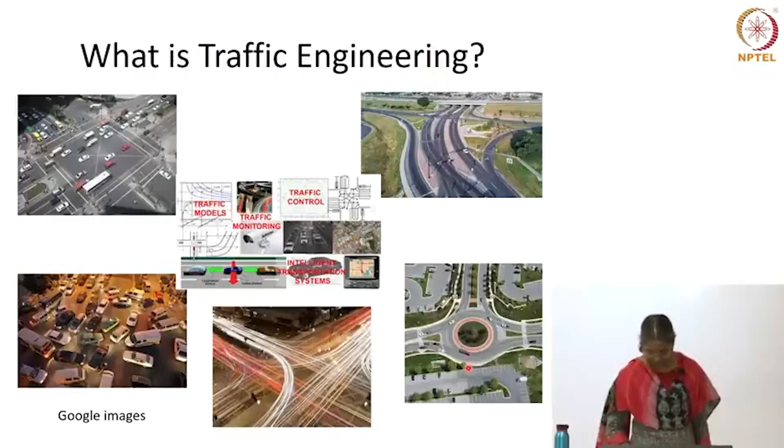So, this is what I got when I searched in Google images for what is traffic engineering. I see intersections, interchanges, vehicles moving, what else do you see? Then there is one with a lot of text saying traffic models, traffic control, traffic monitoring, intelligent transportation systems. So all these are covered by what he said, I believe. So let me show you the simplest definition I saw on a website. It is a very simple website.

It says traffic engineering is a branch of civil engineering that uses engineering techniques to achieve safe and efficient movement of people and goods. Very simple, right? And it conveys what traffic engineering is all about. It's all about moving people and goods from one place to another. The major conditions that you add are safe, efficient and economic movement. So, this is what traffic engineering is.

And why do we do this? There are mainly three problems which we talk about. One is congestion, the other is safety, the third is pollution or emissions. So, when we say we have to design this system, we are talking about how we address these problems or design things such that these problems are minimized. And what is the problem when you try to minimize some of these, or when you look at these objectives? Let me go to the next slide.

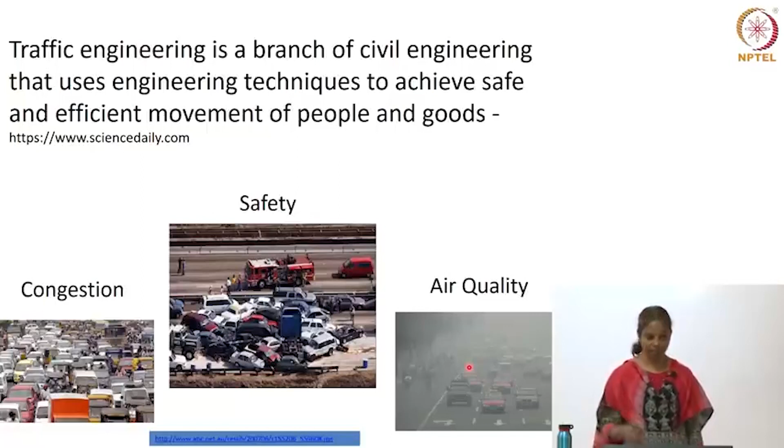So, the basic objectives you will see in any textbook are safe, efficient and economic movement of people and goods. So, what is the problem here? I have a problem with these three objectives. When you talk about safe, how do we make a traffic system safe? Usually you talk about reducing speeds, right? But if you want to make it more efficient, what should you do? You have to make them move as fast as possible, right? So, we are seeing conflicting objectives in the whole process.

That's the difficulty. So, we always look for the optimum way of handling these problems. How do we make them move fast enough and safe enough? But again, you can't say that average is good enough. We want the minimum accidents. We cannot say 50% is good enough for me. So, that's one of the major challenges you will face when you are trying to do this.

And what are all the components that we are talking about? There are mainly three components. One is what you already discussed, the infrastructure: the roadway, the railway, the airport and all those things. The second is the moving objects there: the vehicles, the train, airplane. That's where I am going to concentrate most in this discussion, because the infrastructure is something you have already listened to in two different talks.

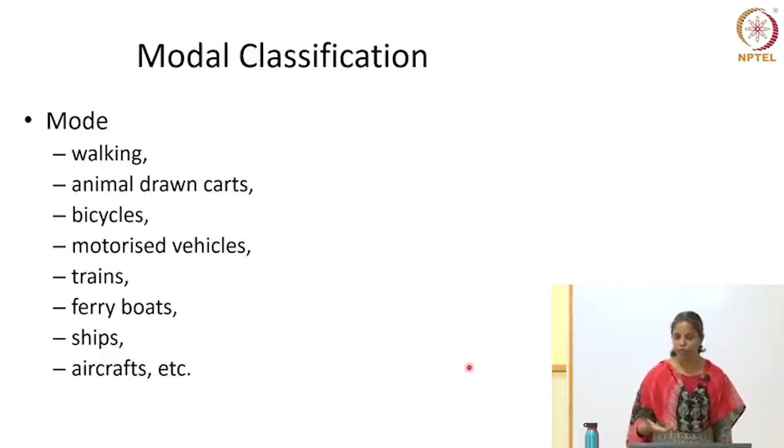That's one of the ways. By mode, you can see these are all the different ways in which one can commute from one place to the other - simplest being walking, running, whatever you want. Then there are different types of vehicles - roadway vehicles, boats, ships, aircrafts, all those. In some way you can group this: land transportation, air transportation, and water transportation. Each of those have a bunch of different types of vehicles.

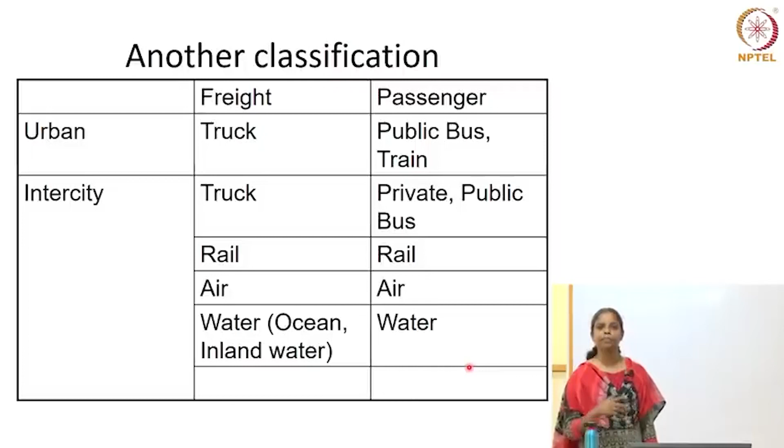A different way of looking at the classification is urban versus intercity travel, freight versus passenger movement. Each of these has uniquely different ways of handling. So these are all different ways of classifying the system.

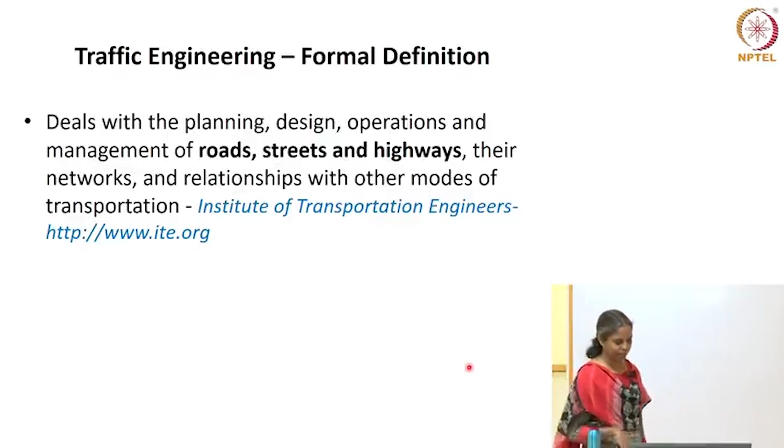Now coming to the formal definition of traffic engineering - what we saw was a very simple, crude way of starting, saying it's to move people and goods from one place to another. Here is the definition you will see in any textbook, and this is restricting it to roadways alone: it's planning, design, operation and management.

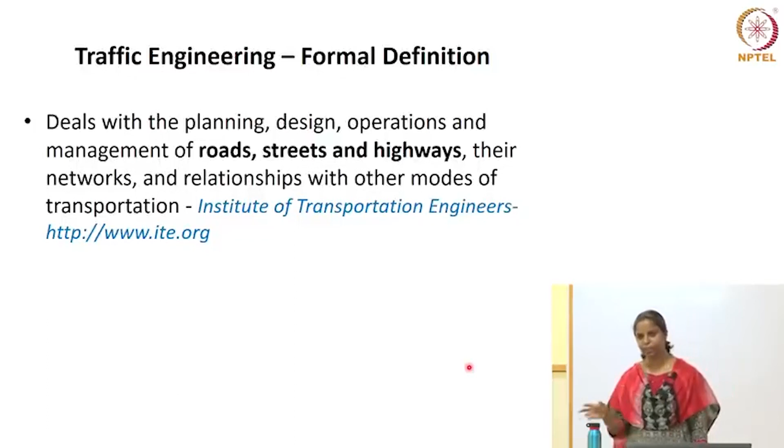So that's the formal definition. These are the stages you go through when you have to do a complete design or complete system development for transportation. Each of these terms - planning, design, operations, management - I will explain in one slide. Each of this is a separate course eventually. You have two undergrad level transportation courses which will cover all these in a very brief way, then there are separate courses for each of these which cover the complete details.

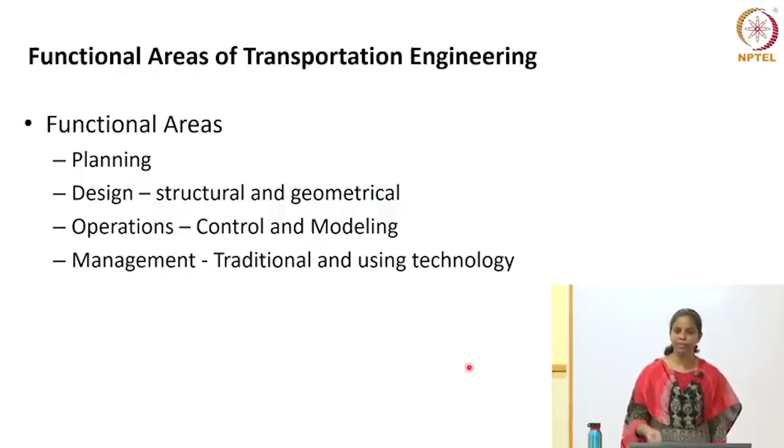So what's planning, what's design, what is operations and what's management? Design is what you heard a little bit already from other lectures, which talked about how you design the pavement, for example - if there is a traffic norm, how do you design the roadway. But even before designing, you have to plan the system. So why is it important?

One characteristic of transportation is you usually don't make a trip just for the sake of it - you don't go for a drive. Very rarely, maybe 1%, you will do it just for the thrill of riding a bike, but most of the time you are traveling for some other purpose. Either you're going to class, going to a movie, or going to visit someone. So there's an end reason for you to make the trip - that's what is meant by derived demand.

So the trip you make is related to some other activities, most of the time socio-economic related things. So the land use plays a major role in what trips happen. If it's a recreational area, the trips are mostly to visit the place. If it's a residential area, people usually want to go to their workplace or colleges. If it's a shopping area, people go for shopping, obviously. So each trip is related to the land use of that area, and the planning part links the land use to the trips that you make.

When you want to plan a transportation system, you start with the land use of the area. So if somebody says they want to move the capital from Chennai to some other city, you will have to design the entire transportation system there. You start by looking at different zones in that area and what is the land use of each of those areas. Then you start planning. So how do we do that?

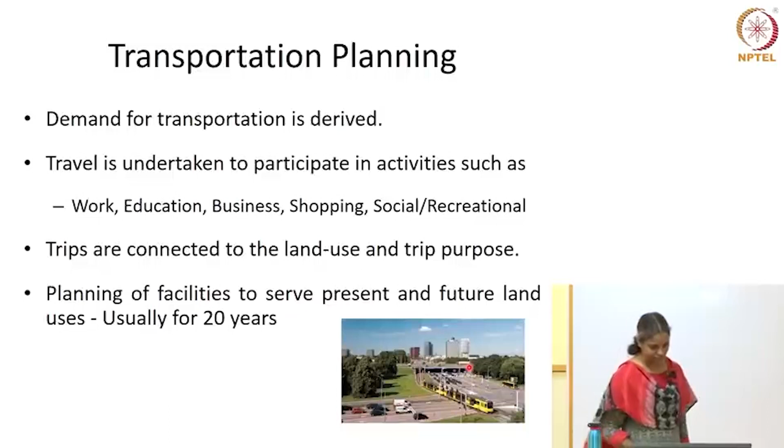This planning and design is usually done for a period of around 15 to 20 years. The planning part has 4 major steps, called trip generation, trip distribution, modal split, and route choice. First you find out how many trips are generated from each place or attracted to each place. Then, from this zone to this zone, this many trips happen - that's the trip distribution step.

Then you look at how many of those trips are done in different modes - two-wheelers, cars, public transport. The last part is which route each of these trips happen through. So at the end of this 4th stage, you know from each zone to each zone how many trips happen, by each mode, through which route.

So at the end of this, you know that on this route, this many two-wheelers and this many cars have to go. Then you get into the design stage, where you use this information to design what type of roadway you need, how much thickness you should give, what material you should use, and all those things. So there you are looking at how to design this system or the roadway.

You will be getting into what I called the hard side of it. You are looking at how to characterize the material, how to design the thickness, how to check the stress and strain generated, whether it's safe, whether it will crack. This is more of the structural design of the roadway. You would have heard lectures on structural design of buildings - similarly, we are talking about structural design of roadways.

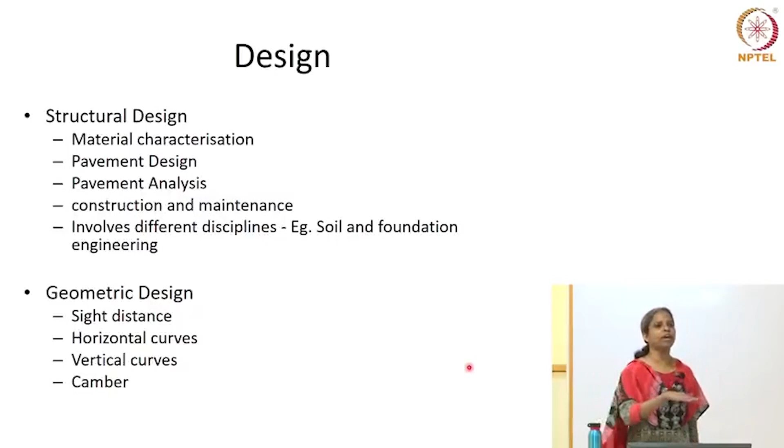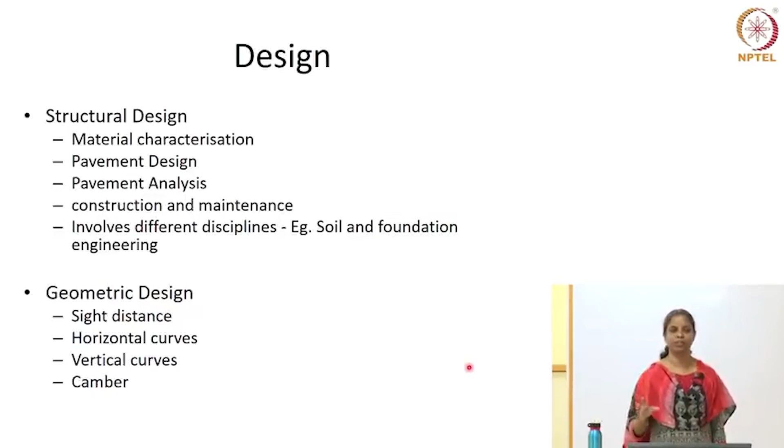Once that part is done, the other part is the geometric design, where you look at how to design the curves, how to make sure vehicles are not thrown out when negotiating a curve, or how to make sure a vehicle doesn't slip back when climbing uphill. You have to make sure it's done correctly - that's the geometric design part. As I said, each of these is a separate course - geometric design of highways is one, offered from the transportation division.

So this is the second stage - planning, then design. Third is what's called operations: how do we control or manage vehicular movement on a roadway? There's no way you can communicate with the driver directly as an engineer - you can't call them and say 'you cannot go this way.' So you need some kind of media to communicate with drivers. That's what operations mainly is.

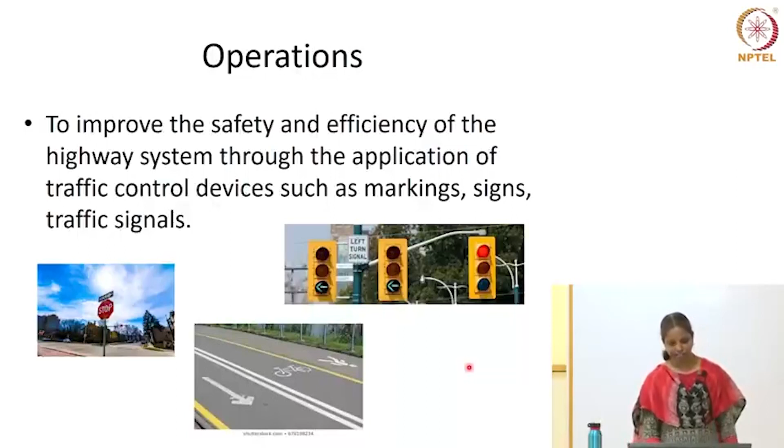It's mostly about signs, markings and signals - you would have seen all of these. Markings are on the roadway, signboards sit at the roadside, and signals sit either at the roadside or across the road. These three tell you how you should behave on a roadway. Operations is about how you design the signals, and how you make sure signs are correctly placed and correctly convey the information they should. It's again a separate course on signal design, signal analysis, and so on.

The last part is mostly management - once you have this, how do we handle traffic, mostly seen being done in India by the traffic police. Suddenly the traffic police decide a road has to become one-way because there's a problem. Ideally it should be done by traffic engineers, but mostly it's the police who do that here.

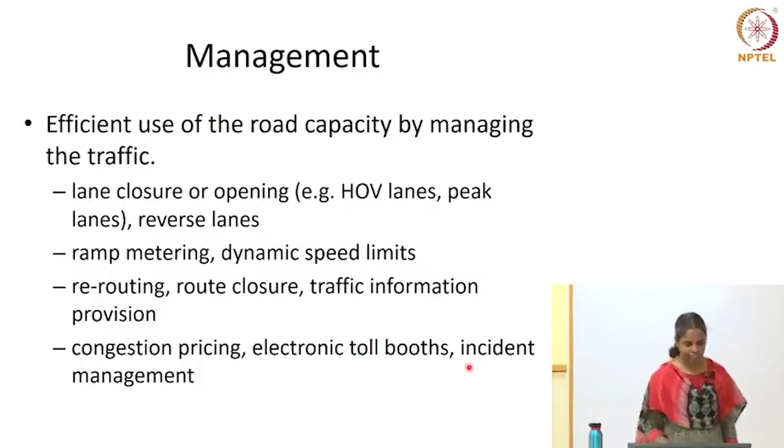But these are different ways in which one can manage the traffic once you have the roadway done, signals in place and all. So having said these four steps, planning, design, operations and management, we will mostly concentrate on the operations and management part.

So one major part is you have to model the traffic. You have seen modeling of different things. For example, a rocket, if you have to design, first you start with equations that will decide how it's going to move, how its trajectory is going to be. Similarly, you have to have models which will characterize how this traffic is moving. It's one way to find out how this traffic is going to behave at different times and different locations. That's what the modeling is trying to do.

And for doing that, you have to collect a lot of information. Traffic studies will come up, and then the modeling part, which can be statistical modeling, mathematical modeling, or just data-driven empirical models. But some way you want to model.

And the other question is, how do we model this system? There are vehicles, then all the vehicles moving on the roadway, then there is the city level network. So which one do you model? That's where these terminologies come.

There are microscopic models, which deal with individual vehicles and how they move. The macroscopic models come out with equations or ways in which you will know how the traffic as a whole is moving. Then there is the network level. At a city level, if you want to model, you don't look at how traffic is moving even at a very short stretch. So how do we do it at the network level?

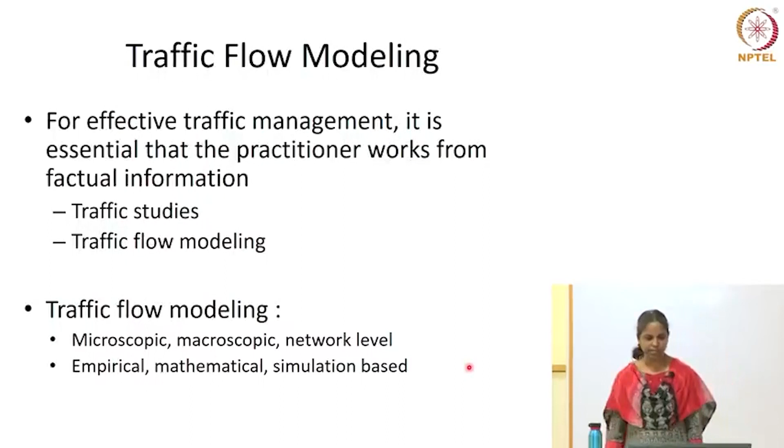And this is something which is more recent. By recent, I mean it started in the 70s, but the other things started in the 1930s. This is in the 1970s, what's called as intelligent transportation systems. Many of you would have heard this term, I hope.

So what we are talking about is, so far whatever we talked about was done in a very traditional way. You collect some data by going there, manually collecting, analyze it, and come out with something. With the latest technologies in terms of sensors, communication, and analysis, there are new ways in which you can handle these problems, whether it's operations or management. So that's what the intelligent transportation system is.

So this is again a textbook definition. It says that any advanced communications, control, electronics, computer related technologies being used in traffic. That's what the intelligent transportation system is.

So I will just quickly discuss a little bit on ITS, because the latest trends in terms of connected vehicles, automated vehicles, all those come from this starting point of ITS. So ITS, there are many examples. Your Google driver assistance is a classic example of an ITS technology.

What do you get there when you are using Google Maps? When you start your drive, usually you do, right? Whoever is driving keeps the Google map ready there. This is my origin, this is my destination, which route I should take or how much time it will take. How is Google coming out with that information? Any thoughts? It's okay, they are recording, but that's fine, you can talk. Now, how is Google coming out with this information that this much time it will take for you to reach this point?

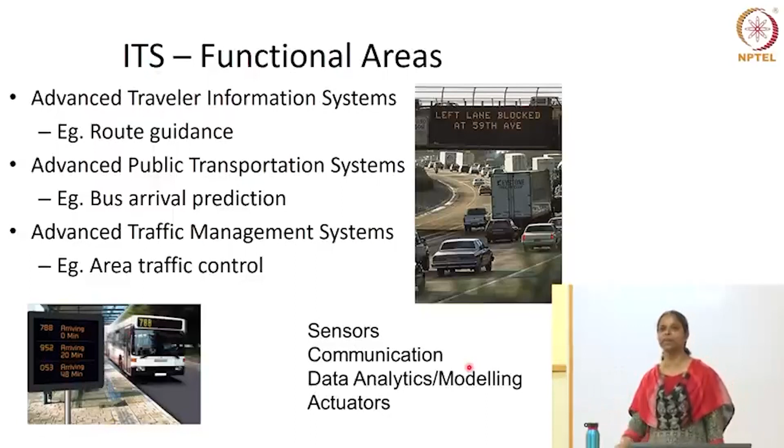So this needs a lot of sensors, obviously, right? The sensors can be at different places. It can be in the vehicles, it can be in the roadway, it can be in the human beings. And with the advancements that are happening, there are enough sensors that get deployed into your vehicles, definitely there. Within you, for example, your cell phone is a very good sensor. It gives a lot of information. Then roadside there can be enough sensors. So, slowly we are also reaching there. Many other countries already have sensors deployed everywhere.

And all these sensors are communicating with each other, which leads to what is called V2X communication, Internet of Things. You must be hearing all these terms, right? So every device or every component of the system is now giving information to each other. They can process this information and know how the traffic is moving. So these are different ways in which you can have sensors in a vehicle or roadside. So as I said, this leads to what is called the Internet of Things. Communication can be vehicle to vehicle, V2V, V2I, V2P. So in general, V2X, vehicle to anything.

Communication can happen. And this is the basic concept from which these connected vehicles, this is one of the hot topics you will hear, connected vehicles. That happens because of all this information, and yes, once you have a lot of sensors, a lot of data, you have to get into data analytics. So a lot of information can be processed.

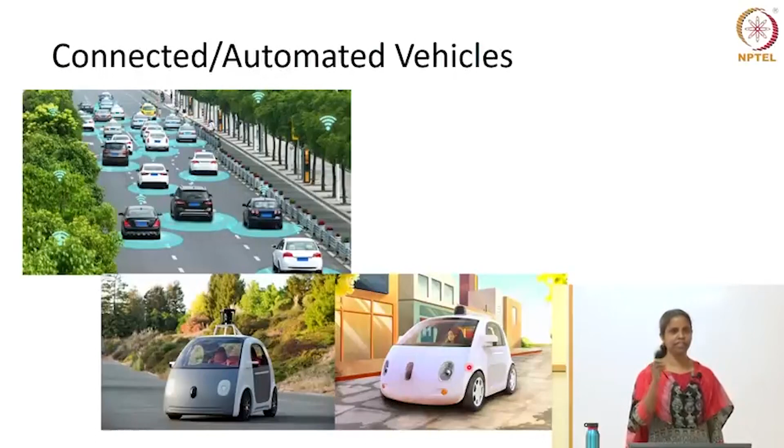So as I said, this leads to what are called connected vehicles and automated vehicles. You must have read about Google's driverless cars and all those things. There are enough countries where they are already running on the roads. Will it come to India? It needs time, it needs a lot of time because we have a very unique way of driving. But in many other countries, we have these kinds of vehicles. So for all these, the starting point is having enough sensors and enough communication happening.

That was quickly giving you an overview of various things that can come up in this traffic engineering and planning side. Having said that, I thought I will just tell you what's the Indian context to all this. So some of you may be thinking, why are we talking about connected vehicles and all when we are still building infrastructure? It can happen in parallel also. So this is one way of looking at it.

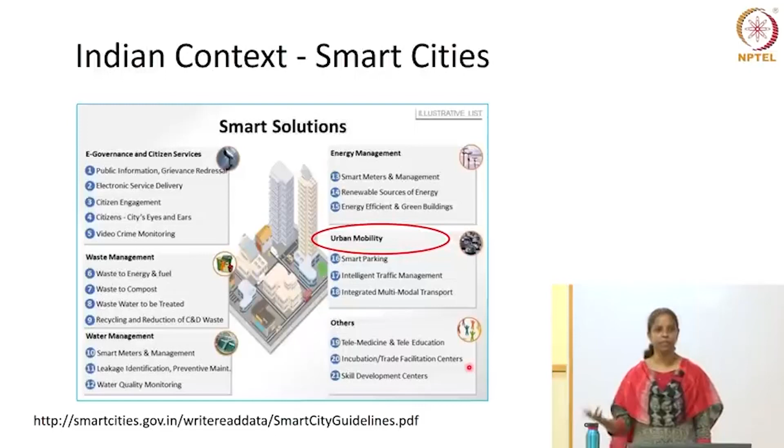You again would have heard about the smart city initiatives of the current government, previous term itself. So mobility is one of the verticals under the smart city initiatives, and that's what I have highlighted. They have given some examples: smart parking and intelligent traffic management, integrated multi-modal transport, and things like that. But it's not that these are the only things. They are interested in anything where you can use technology to make the traffic move better. So that's where some of these things can make sense.

These are some of the details I collected from that website where they talk about what mobility features they are interested in. Let's not worry about it. But what I am trying to say is, under the smart city initiative, there is a lot of interest in terms of having such developments to be done.

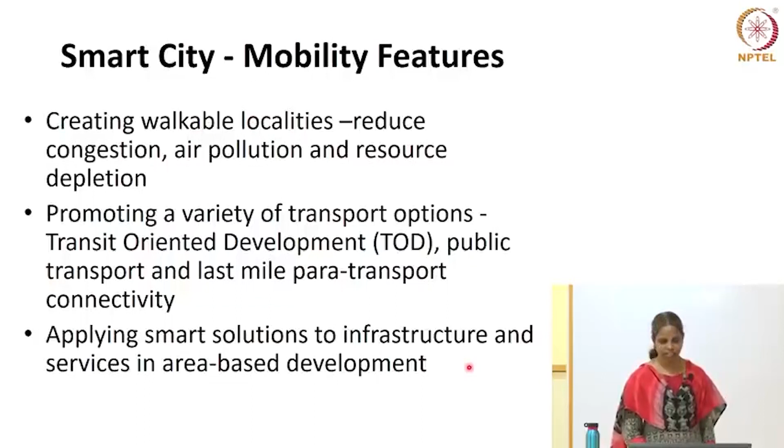And yes, I have to do some PR work also to excite you. So these are some of the activities that are happening in our lab related to this ITS or traffic operations management also. So I will just briefly show you some of the examples just to show what your seniors have done. Much of the work which I am showing was done by undergrad students, either as part of the curriculum, or mostly they were interested, so they just started working on it.

So mainly the activities are, we have developed a laboratory, I will show you some pictures, and we have a test bed, live test bed from where we are getting data. Then we have developed a lot of sensors which work for our traffic conditions. Then some of the solutions we have developed and implemented. So as I said, the tasks I have divided into 4 headings: one is the lab development and the test bed, sensors, then data analysis and the solutions that we develop.

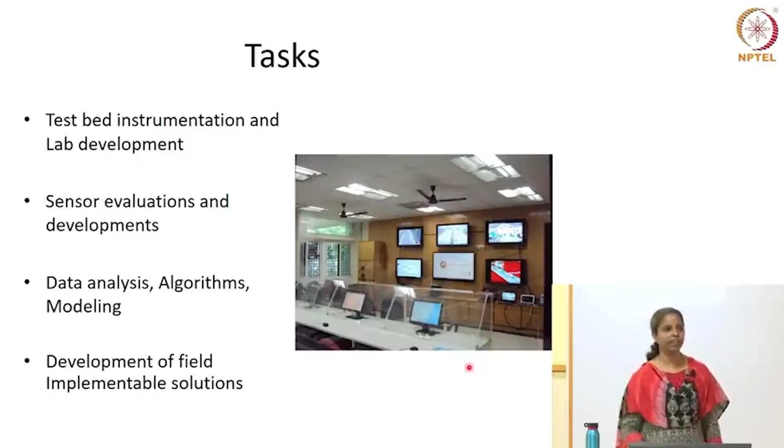This is the picture of our lab. Any of you can come and see the lab if you are interested, we will make sure. So before I get into the details, why do we have to do this, right? I don't think I have to explain much. You know that our traffic is completely different from what you have seen elsewhere.

And all the models, all the solutions that are developed are actually for traffic which is lane based and homogeneous. By lane based, I mean in one lane you expect only one vehicle. They move one after the other. They don't move parallelly within the lane, which we happily do. We don't believe in this follow-the-leader behavior. We will occupy any space available. So in one way it's interesting. We are using the whole available space. We don't want to waste anything.

But the problem is, modeling it becomes extremely difficult because you don't know how the vehicle is going to behave, right? Any gap you see, a two-wheeler fellow can move in whatever way. So how do we handle that? So any solution that's already available, we can't use. We have to kind of redo the whole thing to meet this requirement of laneless movement.

The other is heterogeneity. We have all types of vehicles. There are some 16 different types of vehicles that can be running on our roadways. On the typical US road, if you look, you have cars, you have trucks, that's all. Very small percentage of trucks, maximum number of cars. So it's again a very simple way of handling.

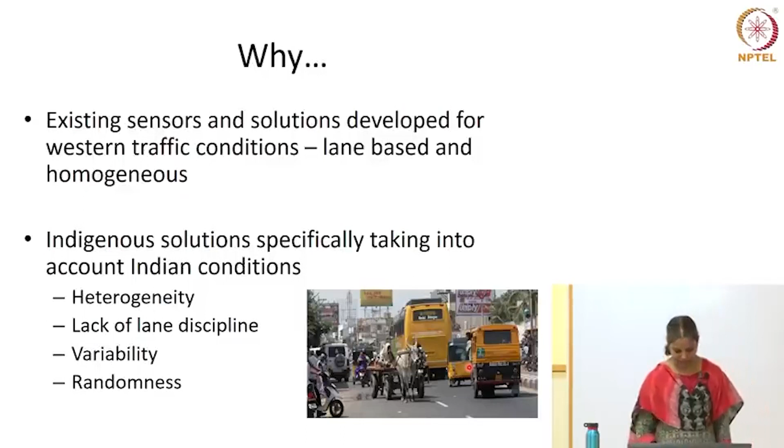So as I listed, heterogeneity is one challenge, lane discipline is another. These two together give you enough uncertainties, randomness. So any model which you develop should actually be handling this randomness rather than the average behavior. So your thing should be able to take into account the stochasticity in the model. So this you don't need, you know what lane discipline is.

So why I said that is, many of you otherwise may wonder, why should you do this? This is already done in other countries, right? Most of these solutions, most of these things are already happening. Why do we have to? Because we have a unique way of handling.

So as I said, we have a lab and a test bed. The lab is just a place where we are receiving all the data. The test bed is the interesting part. So we have a 15-kilometer corridor around IIT, SP Road, IT corridor. You may not be knowing, at least some of the Chennaites will know. So it's all the roads outside which are surrounding the IIT campus. The IIT is actually somewhere here. And we have kept enough sensors in those roadways.

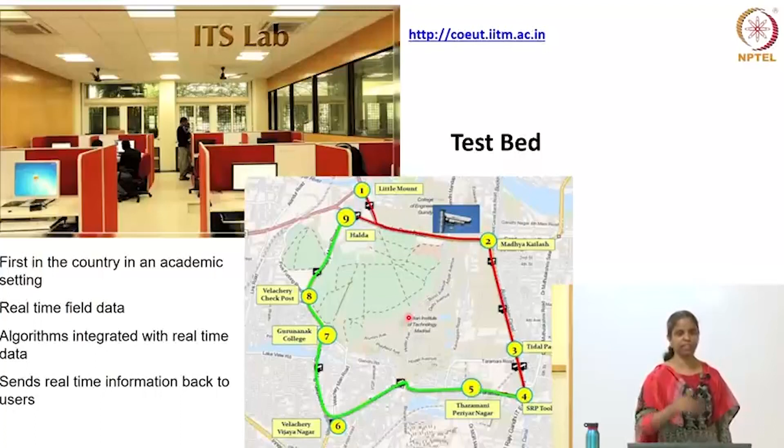There are some, I have the details. So this is the first time an academic institution did that. Actually, even non-academic institutions don't have it. So we have real-time data coming from the field, we are processing it, we are having algorithms running, solutions being given back to the users. So the complete cycle we have implemented in these small corridors.

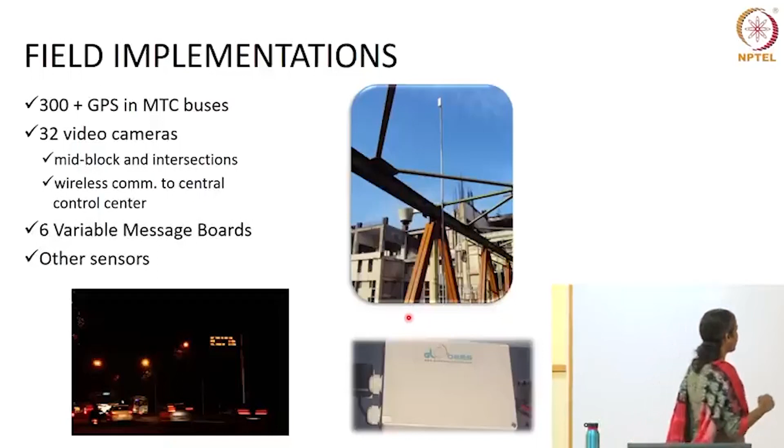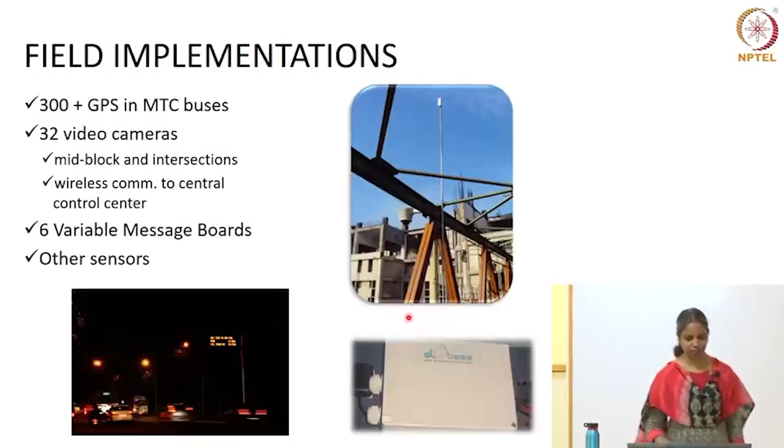What are all the sensors? We have around 300 MTC buses with GPS sitting and sending the data to our lab every 5 seconds or 10 seconds. We have around 32 video cameras relaying their feed to our lab. Then we have message boards which we have installed in the field which give information back to the users. And there are several other sensors which I have enlisted. All of them are sitting in the field and sending us data.

And many of the students were involved in developing sensors. So this is not purely a civil engineer's work alone. We collaborate with electrical engineers, mechanical engineers, engineering design. I have a slide showing all the collaborators. So I usually joke about this. If some of you may be feeling very bad that you wanted to be an electrical engineer or computer science engineer and you ended up in civil, there are no fixed territories these days. It's all interdisciplinary. Nobody stops you from working in any of the topics you want.

So this is one of the areas in which a lot of my students work with electrical engineering faculty, developing sensors. We have developed at least 4 different sensors which are working and giving information in a much better way than any of the available sensors. Details I don't have time for, so I am not getting into them. So obviously we have a good database, a lot of data coming from all these sensors. And for communication, we are using various technologies: GPRS, wireless data transmission, regular wired connection, 2G, 3G modems, etc.

A lot of modeling happens, which again I can't get into the details of, but starting from very simple empirical models to mathematical models to data analytics, all are happening. So depending on your interest, you can pick what you want to try out and then you will do it.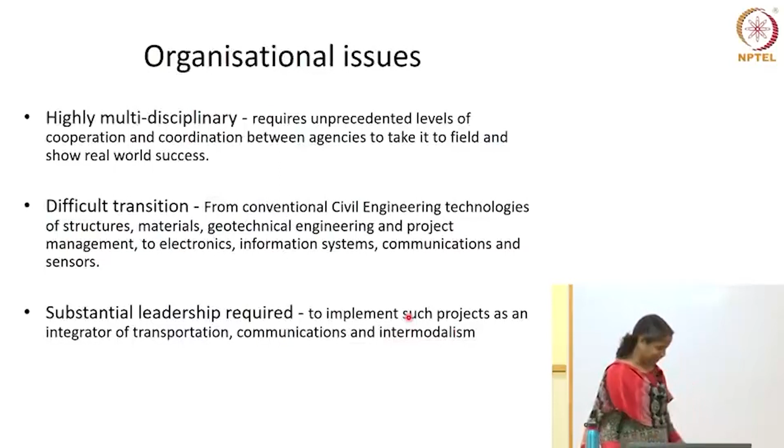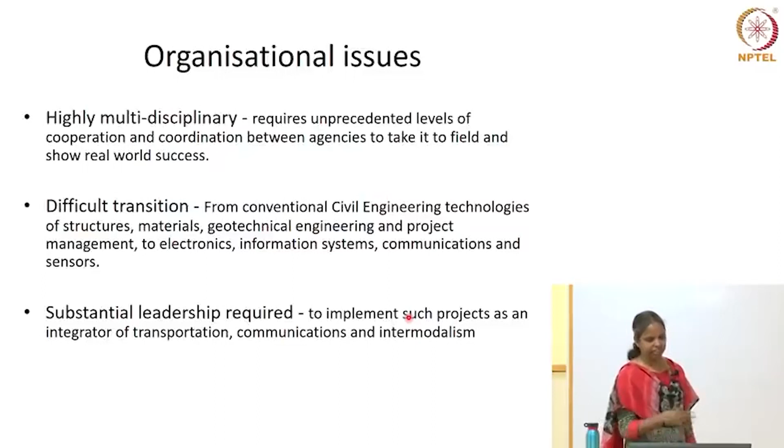I will skip this, as an undergrad student it may not be of interest to you. Basically, I was trying to tell what the challenges are if you want to do this. One main challenge, as I said, is it's not traditional civil engineering topics anymore. You have to work with multiple domains, so it's very interdisciplinary in nature, and it's very difficult to transition, and that needs vision.